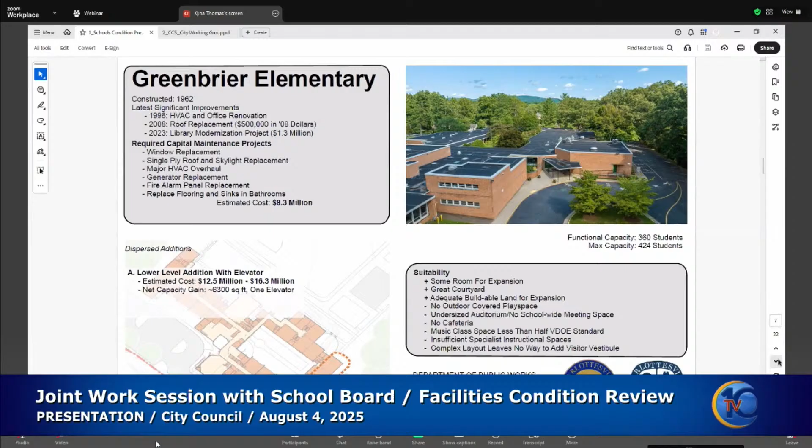The music class space is small. There's insufficient specialist instruction space, and there's no way to add a visitor vestibule. That's been a priority for the schools, to add a visitor vestibule at each of the schools. This one is nearly impossible based on how this school is laid out. Take the next slide, please.

Jackson Via Elementary, you'll see some similar things here. We've done some projects over the years. We did the fourth grade modernization downstairs, which you'll see in a minute. But we have some big issues here too. The roofing, which is on schedule to be done in a couple of years. It needs an HVAC overhaul, and we need to replace building sealants. Lower left, you'll see some suggestions for how we had planned to expand the school in our last go-round.

Suitability of the school, it's got a lot of land, that's good. It has 2 internal courtyards, which are very nice. It has no kitchen or cafeteria though, and natural light for the classrooms is minimal. It's got those slot windows, so each classroom has a little window about this wide, and that's what lets natural light into the classroom. I can't speak for what people were thinking back in the day, but kids are like plants, they need light. And there's no outdoor covered play space. Next slide, please.

Summit Elementary, this is one of our oldest schools, but ironically I think it's one of the best. Constructed in 1930. There's been a lot of development over the years, major addition, for instance. Unfortunately, that major addition built floor plates that don't match up with the existing floor plates, so there are like half floors at the transition. Again, I don't know what they were thinking, but, and this is one that Kim mentioned, has very little space for expansion.

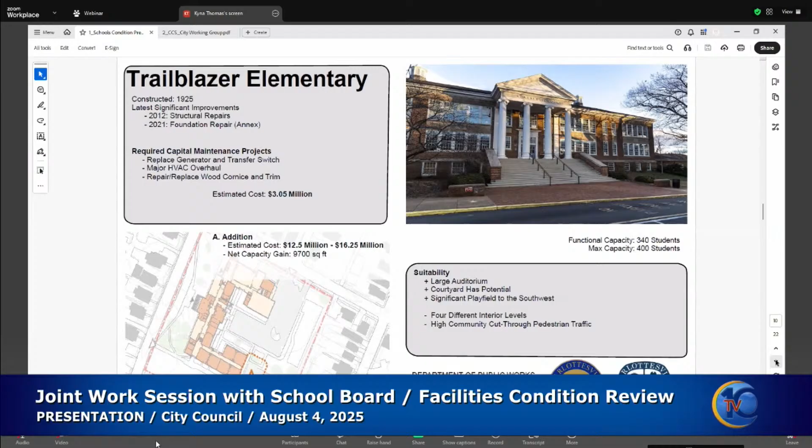Sunrise Elementary, we've done some work here recently. We did a library renovation here a few years back. It had a roof replacement in 2000 and it will get another one in 2027. It had a security vestibule addition, which is good. But in the future, we've got, like I said, the roofing membrane replacement, some slate roof repairs, HVAC overhaul, you're seeing a theme here, floor covering replacements.

Suitability-wise, it has a nice library, because we just did it. It has great solar orientation, which is a good thing, especially since we're trying to put solar on a lot of our schools, and all of our new roofs are solar ready.

Adequate buildable land, so we could build an addition here or something else that we needed. Art room is inadequately sized, however. ISTEM room has egress concerns, so it's down in the basement, it's hard to get in and out of there. And then there's 2 isolated lower levels that aren't connected in the middle, they're just kind of separate out.

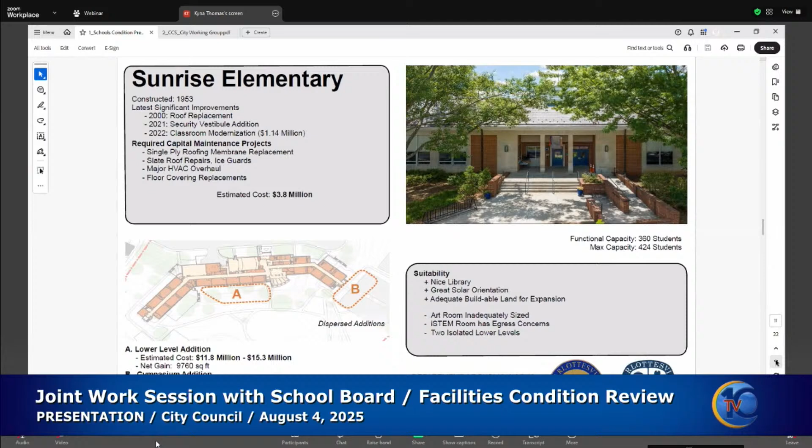Next slide, please. Tall Oaks, this one was known as Johnson, in case you're confused, I know I still am.

This one has recently received a rooftop terrace, which is a nice addition. We just finished that one last summer. There was a library addition back in '94. It needs a roof, it needs skylights replaced. It needs, once again, a major HVAC overhaul and a generator replacement.

Its suitability, trails are nearby, that's good, it's connected to the neighborhood. Outdoor learning spaces are well connected. Good amount of buildable land there, so if we wanted to do something we could. And good natural lighting. So these middle era schools tend to have decent natural lighting.

The media center could use an upgrade. Outdoor play space would be useful, it's covered. Multiple classrooms are undersized, this is a specific one for this school. And then there could be some more specialist instructional space.

Next slide, please. Charlottesville High School, this is a big one. Constructed in 1975, it's a very large school, very spread out.

We just did, as I mentioned, the B Commons restroom modernization, very successful project, maybe a template for things we'd like to do in other schools. The electrical distribution center system was just redone, we just finished that up. The roof replacement is just now finishing up, 3rd phase, so we've all lived through 3 phases of roof replacement on CHS now.

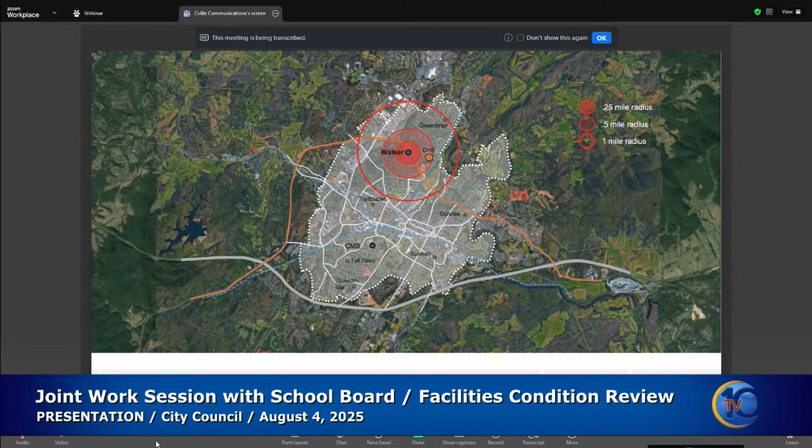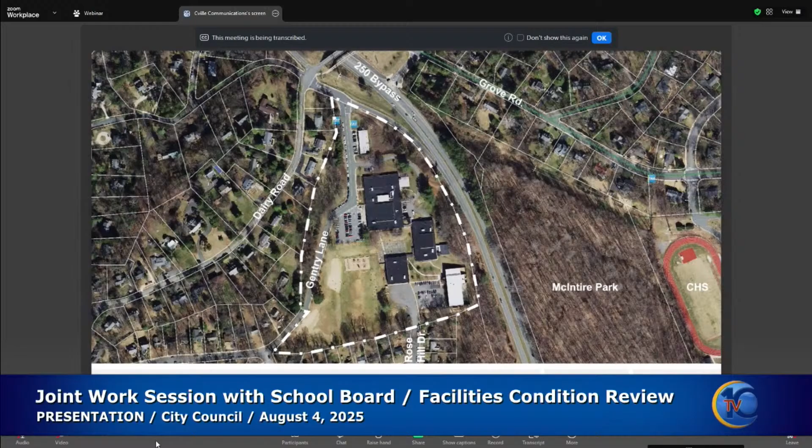Walker campus, of course, is located at the north end of town, right by the bypass, not far from Charlottesville High School. Here's a site aerial. Rose Hill Drive tees into this site at the south. Gentry Lane runs along its west edge, and along its east edge is Busy Road, known as the 250 bypass. McIntire Park is just across the bypass from this site.

So here are the uses that we were asked to look at fitting into the Walker site. Some are on site already, and some are new ideas to bring to the site. I'm going to go through them one by one with you. Central office: currently there is a central division office at the north end of the site. Central office does have an issue, though, where they can only fit about half of their staff within this office building. So the other half are in the lower level of Charlottesville High School - a challenge for operations. There's a desire to one day bring all the staff together so they could be in one building, and also free up that space within Charlottesville High School so it can be dedicated to academic use. Next, the Crow pool.

This is an existing facility in the southeast corner of the site. In addition to the pool itself, there are some recreational spaces, used for after-school programming at times over the years. It's an existing Parks and Rec asset. There's visioning ongoing about what the future of it should be, but it is serving the community at this time, and over time has been used occasionally by students on the Walker campus, which could continue into the future.

Next, the Early Learning Center. That's going to be a lot of the focus of what I talk to you about this evening. We're looking at a new purpose-built home for Charlottesville's youngest learners. This is a really big deal. This is bringing all the preschool staff, leadership, and resources, which have been spread across the 6 neighborhood elementaries to date, into one building that's purpose-built for young learners, whose needs and academic patterns are very different from elementary schoolers, middle schoolers, etc. So, very exciting new project.

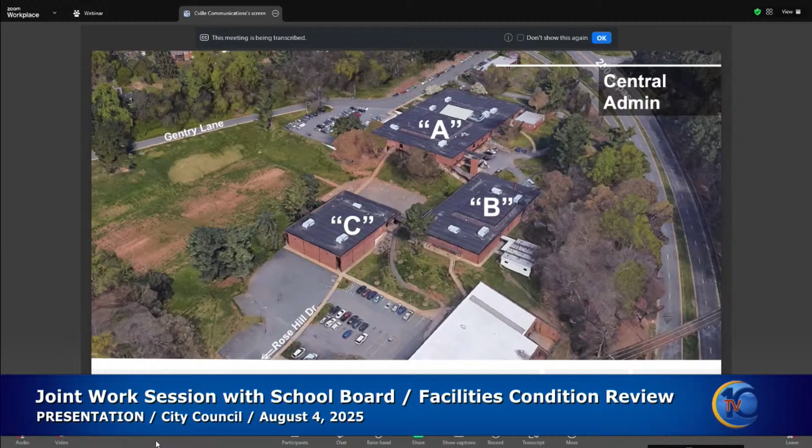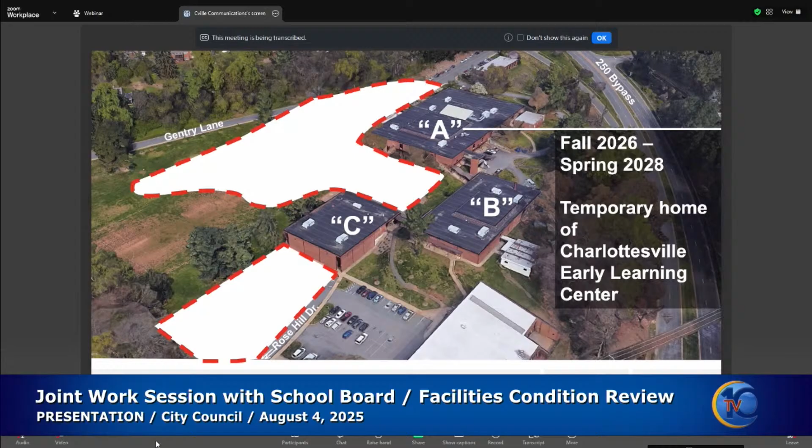Starting about a year from now, all preschool classes in Charlottesville City Schools will take place in Building A without much significant renovation, using it as is as a swing space while construction of the new facility occurs right next to them. If everything stays on schedule, that means about a year of design and then a couple years of construction, and in fall 2028 they'll start school in their new facility.

We've worked on this concept design to try to stay out of the way of other site uses, but also to tackle one of the major challenges of this site, which is that it really lacks outdoor play and learning space at the classroom level. We worked hard to provide that amenity to the new building, and also to improve the case for Building A somewhat as well.

You'll see we're entering the new Early Learning Center from a bus loop facing north. The red triangle points at the entry, a front door on Gentry Lane, not far from the existing Building A entry.

There are a series of terraces, so each level of classrooms, and there are 3 levels, step all the way down to the playing field level at the center of the site. Each offers every classroom immediate access to outdoor learn and play space that's secured and developmentally appropriate for play and learning. It's really an outdoor classroom.

One quick question: would that road have to be relocated? I'm trying to think, for Building A to the road, is there enough space there? Yeah, there's a retaining wall involved basically in moving it. So this is going to be right up to the current building? Yeah, pretty close.

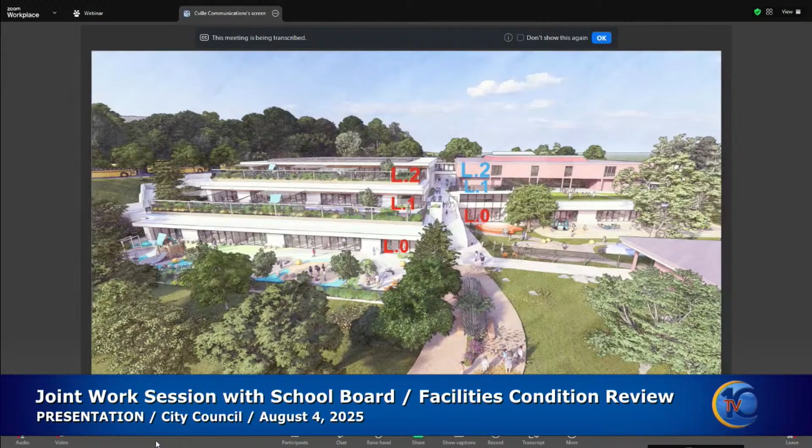This is a front door shot of the new Early Learning Center with the green signage above. We're standing with Building A on our left, the new bus loop to our right, and the big hillside along Gentry. The open site circulation down through the site is visible in the slot there, where we could pass under that connector to Building A.

If we have time, I could check in if people have questions on this, or I could just move through to the master plan. Is that the last slide? This is the end of the concept design portion, and then I can lead you through the master plan. We have about 15 minutes, so let's move quickly. Any questions from council? Okay.

The master plan will put some of this in context too. All right, next slide, please.

I think we all agree that it looks really nice. Yeah, yes. Wonderful, we've had a lot of fun with it over the past month for sure.

So how does this Early Learning Center design fit into a larger plan for the Walker site? Here are our site uses that I described earlier.

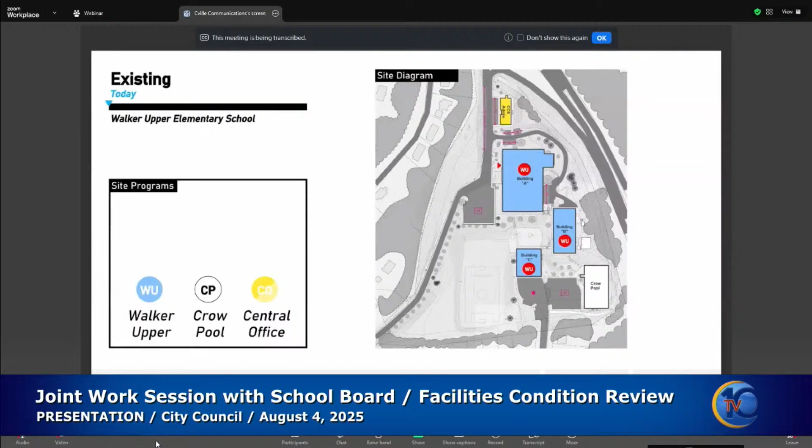Today's picture shows us using Buildings A, B, and C for Walker Upper Elementary. Admin is on the north, Crow Pool is on the lower right of the image, southeast. We already talked about the Early Learning Center moving into Building A as a swing space, and that'll be through spring of 2028.

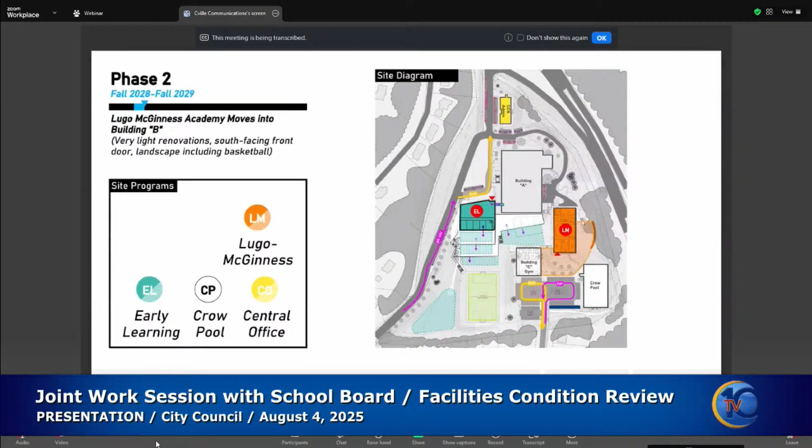Then with a year-long project of light renovation, Building B could become the home of the Lugo McGinness Academy, giving them use of the gymnasium. We're proposing they would have outdoor recreational and learning space in an L shape—that light orange area to the east and south of the building. So the central courtyard, currently the blacktop, is dedicated to younger students, and they have their own space apart from that.

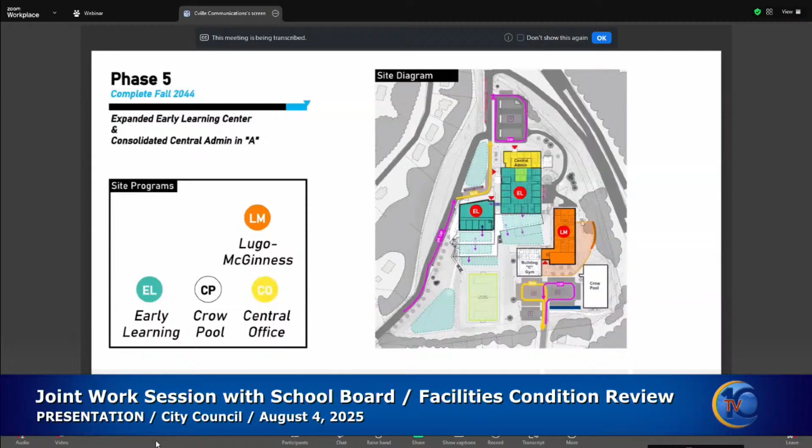Overall, we've worked and believe we've really shown that it's possible to accommodate multiple uses on this site. And in a sense, it's so sloped, it's almost better to have multiple small uses than to try to span the whole site with one institution.

We have reused existing buildings, so the only building demolition in this plan is that small admin building. Every other building is maintained and reused for a meaningful purpose. We've improved site circulation, provided some vehicle loops that are much needed, and located outdoor space for students directly outside the buildings they're in. We believe there are multiple off-ramps, a good phrase we got from the schools.

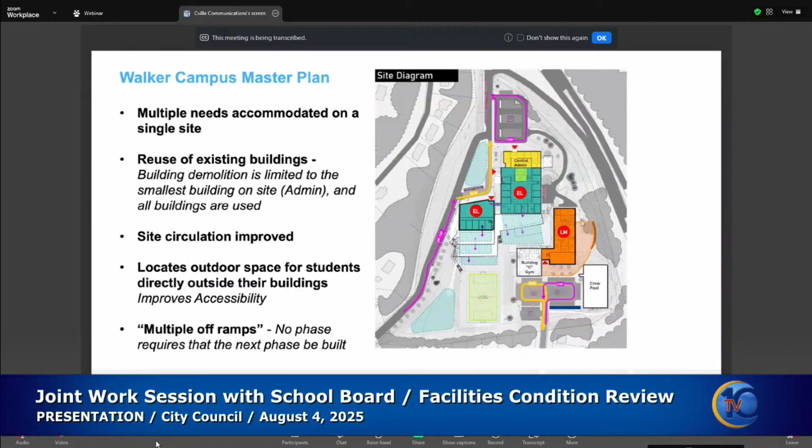None of these phases require that the next phase be built, so it's all possibilities, not necessities. We're excited to have been able to work on this project with the schools. And we're at questions.

If I could, I'll just quickly jump in to frame that. I'm not trying to trigger anybody, but the FEI conversation we had just a few months ago really caused some reimagination to be possible. That site specifically triggered a lot of, but what would we do if we got that piece of property? How could that make a difference? Losing that property, we did not lose that energy. We actually just redirected it to the Walker site, and that's where all of this has really come from.

The focus has been on, we have talked about, and this community has been prepared for the idea that the Crow Pool is to be demolished. That was discussed some time ago. While we still know a decision ultimately has to be made, it was slated for demolition. This original design called for the gymnasium and the auditorium to be demolished, and we pushed back into, well, what else might we be able to do based on what came out of that FEI conversation? So we're looking at this particular slide because we were given that opportunity.

So I'll thank the federal government for at least triggering that part of the conversation because it really made us be a little more creative. I appreciate the moment it calls for us, because we were able to go back to the designs and say, well, what if? What might be possible if we did this? And that's how you have what VMDO just presented. So I just wanted to point that out to you, and now we have to figure out how to pay for it, but at least we figured out what it could be.

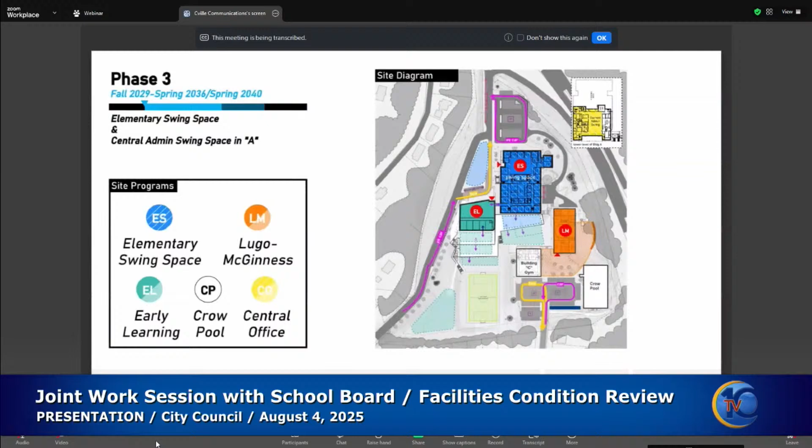All right, we'll have a chance to provide some programmatic feedback to Dr. Gurley and his team based on that. So I think this conversation is going to be more directed with what we want council to hear from us. I don't know, it's the technology of our time, but I think one slide I'd love for us to be able to go back to is what the dollar investment early results in, and I just hope that isn't lost. I don't have to sit in your seat and figure out exactly how to fund this. Our job is to advocate for our schools and our students who are also your citizens. And I think paying attention to what that dollar investment equates, what did it say, $7? And anyway, Mr. Myers, go ahead.

No, I appreciate this. I would just say this vision looks great to me, and let's go, in my mind. Sorry, Dr. Gurley, you're gonna have to wait 20 years, but maybe that's incentive to keep you around. No, but council colleagues, I'm speaking more for myself.

I think this is an ambitious vision here, and a lot of us want great opportunities. I heard a lot of comments from you all earlier that we do need to modernize, and we're completely in agreement there. If we have to go get a referendum for sales tax, and this is the vision, I would be very behind helping you all sell that, walking hand in hand with you to help sell it to the public too.

Yeah, thank you. Thank you for all of this. Nice to see you, Maria, again.

I guess I wanted to roll back a little bit when you were talking about, Mr. Freeze, the options - I don't know if it was you or Mike - the options of whole building renovation or upgrades and the time that it would take to do that study.

Was it 3 to 5 years that I heard you all? So I believe when you initially presented the option of looking at just doing the minimal upgrades and continuing to do just the improvement programs per site or per school, as opposed to looking at doing a whole school upgrade or modernization, I thought I heard one of you say it would take 3 to 5 years to do that cost estimate study. Is that for all of the schools? Maybe it was her.